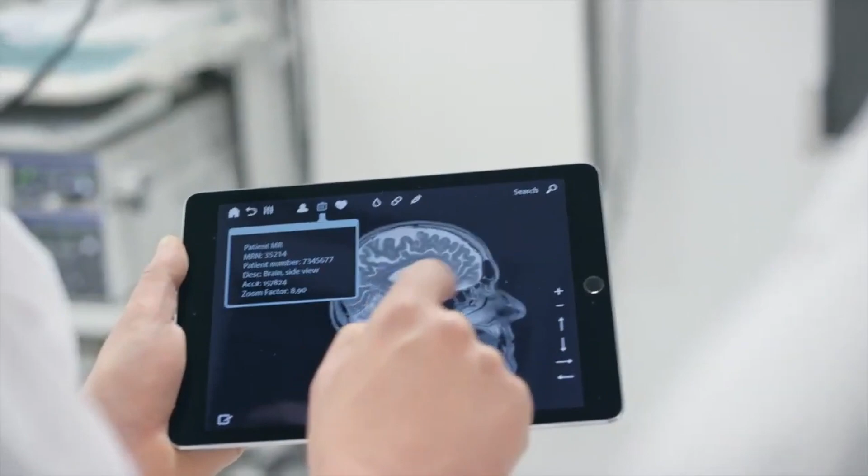Time now to introduce Dr. John T.C. Lee, the President and CEO of MKS Instruments. MKS enables technologies that transform our world. They provide technology solutions for leading-edge semiconductor manufacturing, electronics and packaging, as well as specialty industrial applications.

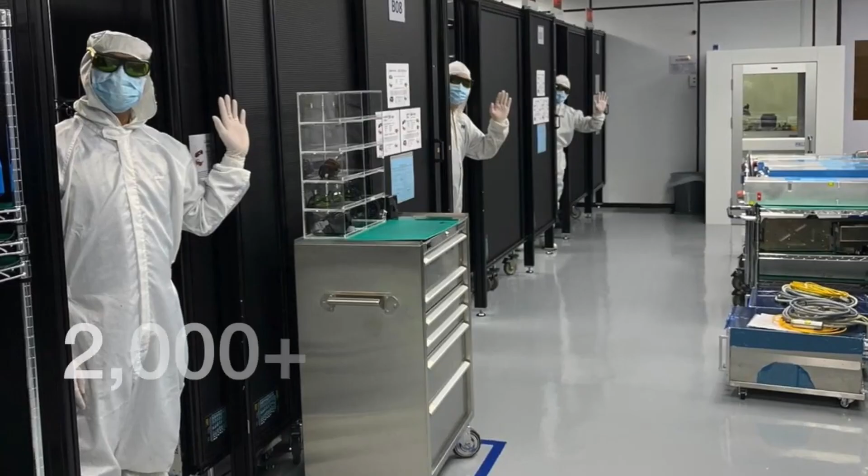MKS is a global leader with revenue of $3.6 billion and over 10,000 employees. John has been with MKS for 15 years and played crucial roles in expanding the global presence of the company, driving substantial growth in photonics, semiconductor and chemistry applications.

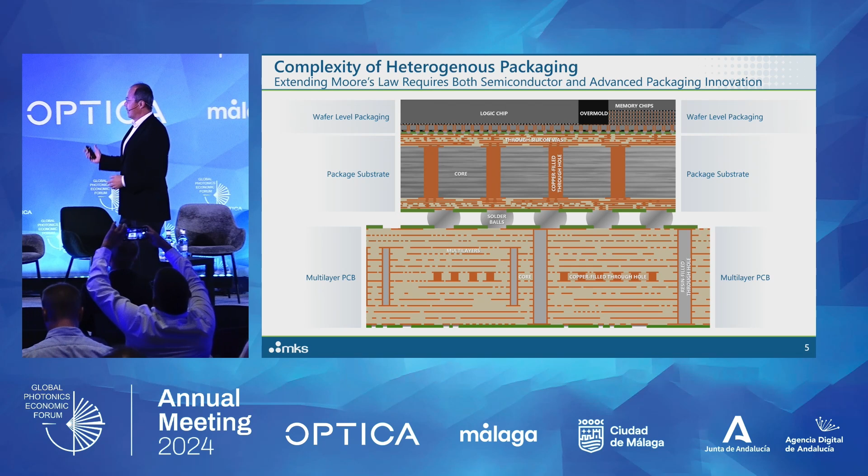That's the hard part. And then you got these solder bumps, and you see another board beneath. And that is just a regular PCB. That would be something where it's 4 or 5 layers, and you would say, that's my washing machine, automotive, and that is true. But for advanced packaging, because it's so dense, the number of chips at the top, it is now 30, 40 layers, okay? Older technology, but that's also growing as well. So you got to do all of this just to make one NVIDIA GPU board work. And that is why I say the chip is necessary, but wow, look at that packaging.

And so when you think about where the technical challenges are coming for the industry to keep more than Moore's Law going, well, you got the semiconductors thing. A lot of folks have talked about how hard that is, and it is hard. I think Luc Van den hove said the ASML extreme ultraviolet lithography tool is $250 million to $300 million. If you want the better one, it's $400 to $500 million a copy, right? That's really hard to do.

But look at all the work that we think we will need for advanced packaging. More layers, smaller features on each layer, and Moore's Law is about making things cheap. If the industry can find the cheapest way to do it, you get to have this party continue. And we see all these technical challenges in packaging, and we see the same kind of movie that we saw in semi, it's just 30 years later.

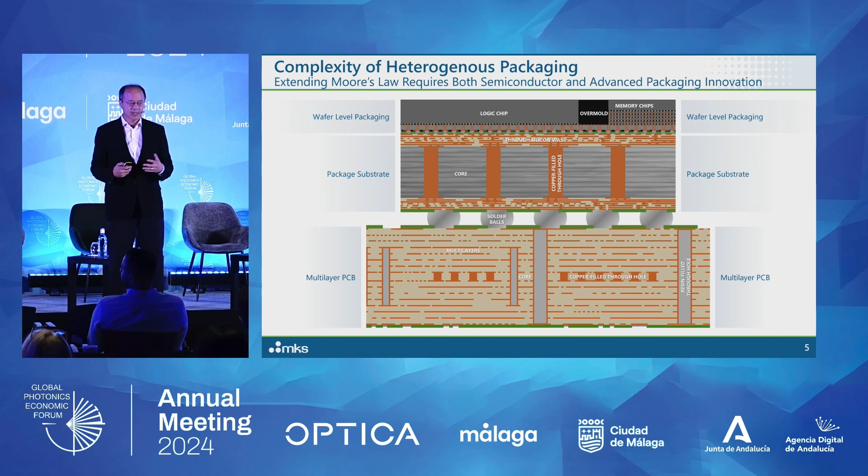So semi 30 years ago looked hard then to everybody who was in it, but you think about what we did then versus what we do now. There was a lot of work, a lot of development because of shrinking, more layers, and we see that same movie is going to play out in advanced packaging. And that's why we, as a foundational technology provider, want to be in that.

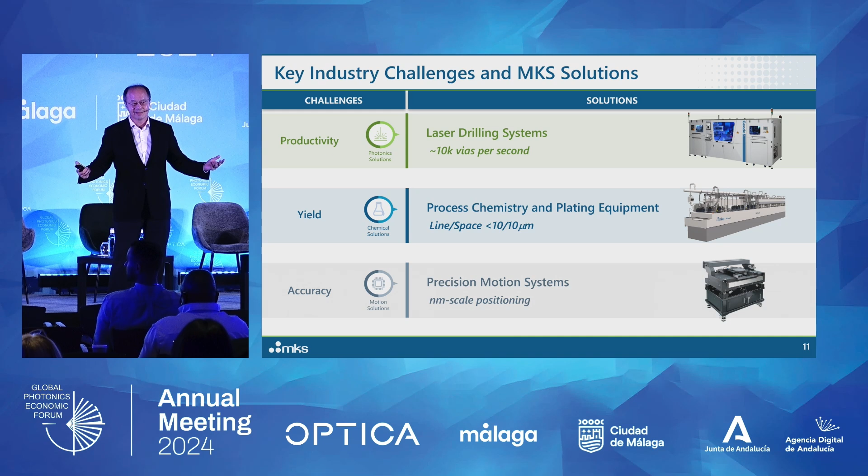Just for scale, the picture at the top is a laser drilling system. Panels go in the right, they get drilled, panels come out in the left. The height is 6 feet, and the length is 9, 10 feet. Okay, so that's the size of that tool. In the middle is a chemistry plating tool. Just for scale, the size is 20 feet high and 100 meters long. Meters, right? So in a factory for plating, you might have 5 of them. So basically, when we have a new greenfield, we're working very closely with the customer because they're building the factory around our tool. It literally is the factory, okay? So that gives you a sense of scale.

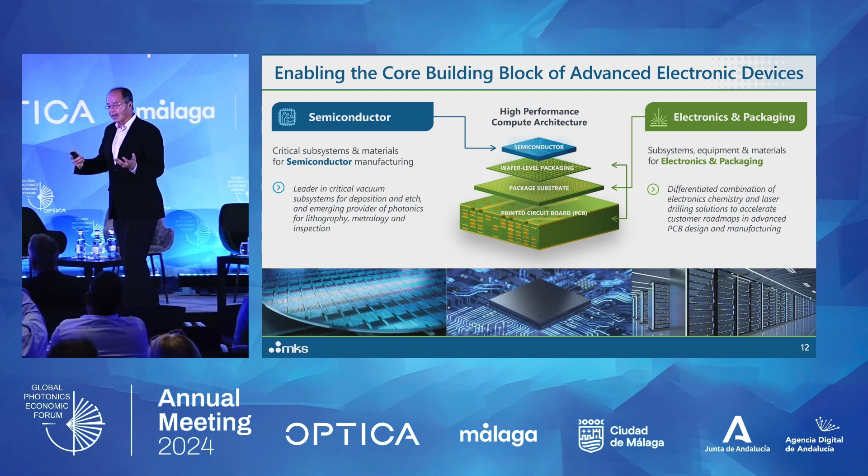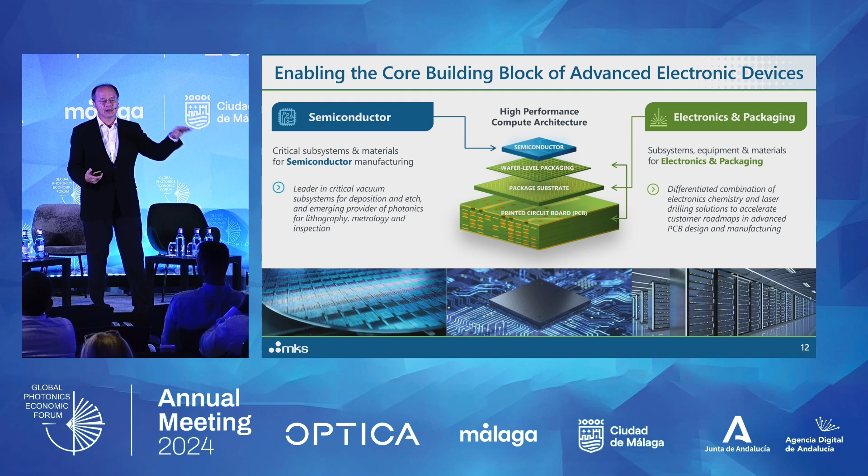And so a little more simplified, these are the core building blocks. That picture I showed earlier was complex, but simply there's a semiconductor. I've got to package it somehow through wafers, and then the package substrate, remember, just another PCB, and then an even more complex PCB. The whole idea is I've got to get the chip to the outside world. Before, I would just do some wire bonds, and I'm talking to the outside world with a chip. I can't do that anymore because I have multiple chips talking to each other, and I've got to have different layers of interconnection as it fans out. Okay, so that's really as simple as that.

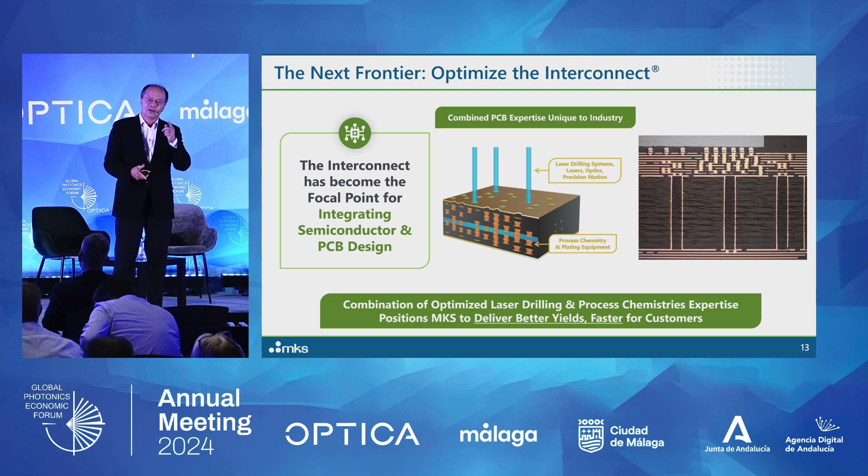And then, of course, we drill down and call that optimized interconnect. So you're drilling holes. You think about this cartoon, a cross-section, especially in the middle, you can see it looks like a semiconductor back-end chip. If some of you have seen semiconductor cross-sections, copper interconnects, different layers, holes connecting them in lines and spaces. It's exactly the same thing on a larger scale today, but shrinking every day and more layers every day.

And so when you think about the process flow for that, these substrates, I think there's a couple of substrate makers here. These are, as I said, polymers with glass fibers, but they also have copper on top. So it's called copper-clad laminate. So there's a layer of copper on top. I've got to drill a hole through that copper and through the polymer, and then I can fill it, and I've got some copper on top already.

You guys are photonics guys, right? What happens when you shoot a laser at a nice shiny surface? Yeah, bounces back, it doesn't absorb, nothing good happens, right? And so we have to pre-treat it. And how do you pre-treat it? Well, you put a coating, a blackening, in an Atotech wet chemistry bath. So it's already using Atotech for that. Then you drill it, so it's got to come out, and then you've got to do the drilling. Before we bought Atotech and brought them into the family, they were always saying we should buy a laser company because then we'd have the whole process in one company. They had that missing piece.

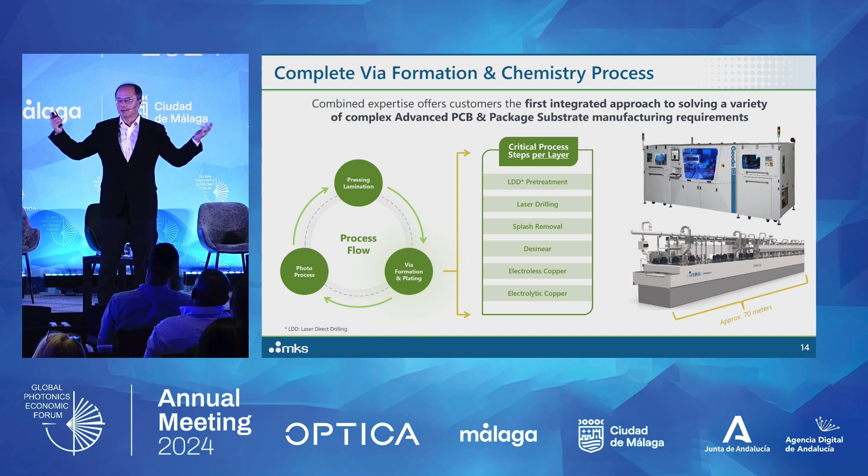Now they're all together. So then the laser drills it, and as some of you know, this is not like a nice lathe that's kind of carving out. It is an explosion. You're shooting a laser burst and you blow it up. And so what happens when you blow things up? Yeah, shrapnel, right? Everything goes to the side. You've got to clean it. Then you've got to pre-treat the surface, and then you want to put the copper in that hole. And electrolytic plating is the fastest. Electrolytic means I use electricity, right? I can only use electricity, though, if there is a continuous conductive surface. And the hole, remember, only the copper's on top.

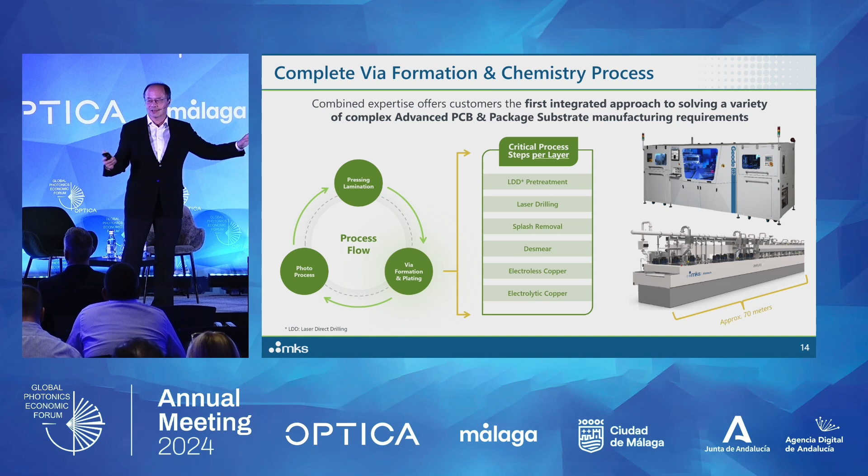The hole is polymer and glass fibers. There is no continuous conductive surface, so I've got to do electroless, no electricity, copper plating first. It's slower. I've got to do it right. Can you imagine trying to put a nice layer of metal on a hole you just blew up with glass fibers sticking out? Literally, when you do cross-section, just glass fibers sticking out. But once you do that, then you can do electrolytic, which is much faster, and you have to fill it.

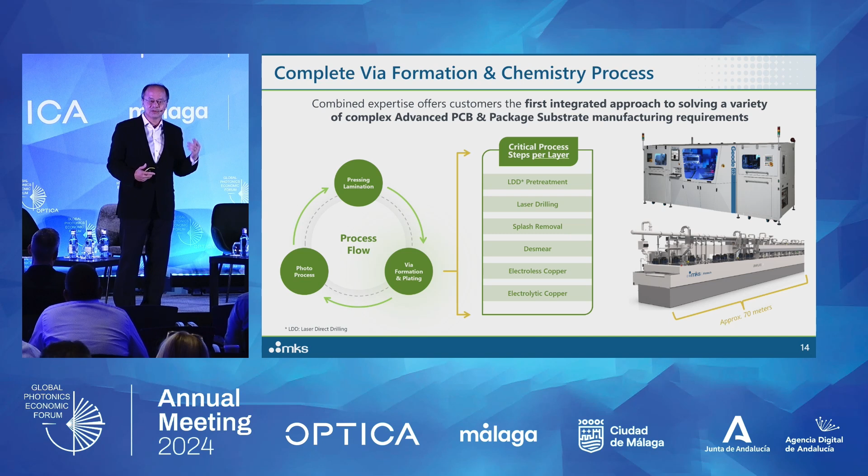And now, here's a challenge. The holes are getting deeper, higher aspect ratio. How do you tell chemistry atoms to go plate the bottom first? Don't plate the sides, because you pinch it off, you got a hole, right? And by the way, don't plate the top, because I don't have to remove as much there. So we are literally using chemistry formulations to plate at the bottom of the hole first and fill it from the bottom up while we're preventing plating on top.

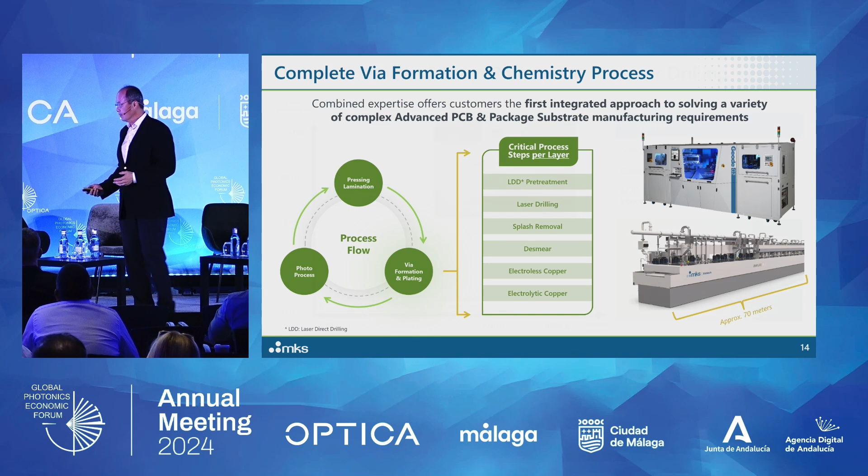So that's why Atotech, that division's gross margin is actually the highest in our company. It's higher than the optics we send to ASML, right? It's not an easy thing to do. But we do that. And here's a little picture now focusing on one particular step, the laser drilling. On the lower right is a laser drilling tool, drilling stuff. I'll show you more about that.

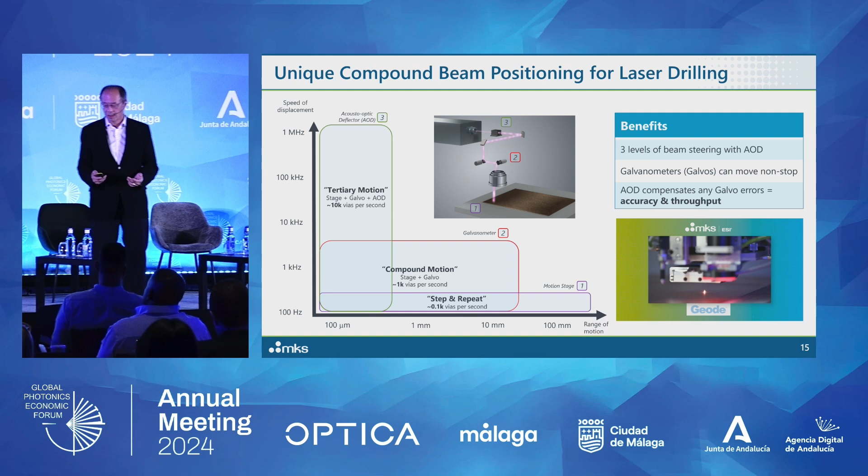The second motion is galvanometer on top, and that can steer the beam. That is less range, but faster. And then the last one is even less range, but really fast, and it's called an AOD, acousto-optic deflector. And we use all three. So you're probably wondering, what is an acousto-optic deflector? This is where photonics really comes in handy. So number one, it's a crystal. There's no moving parts, so high reliability.

You put an RF drive on the bottom in the cartoon. You can see the coil on the left in the picture. And that's a megahertz RF frequency. And because you're putting that megahertz frequency, you can actually move and control the beam as it goes through the deflector, the optical crystal. You can move it so it's going this way. You can move it so it's going that way. You can change the amplitude, therefore the power, really at the megahertz regime. So that's the photonics innovation.

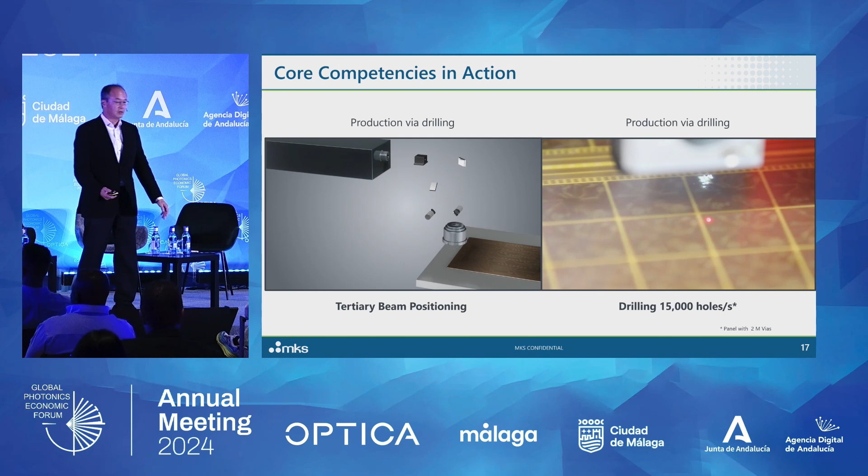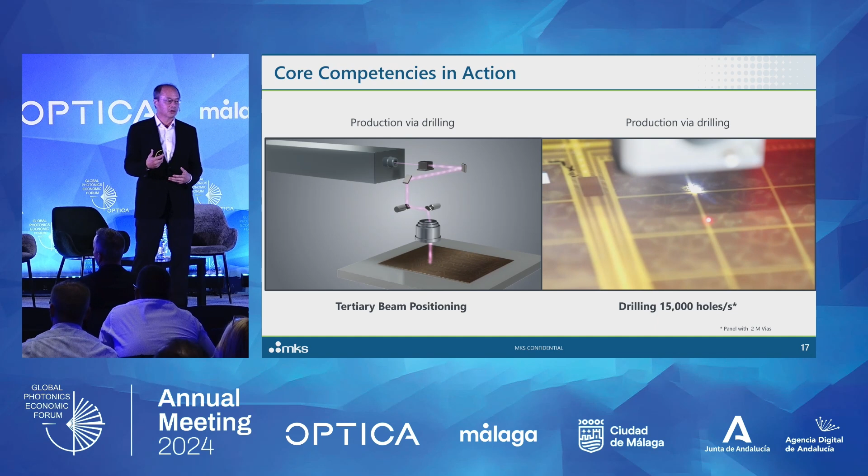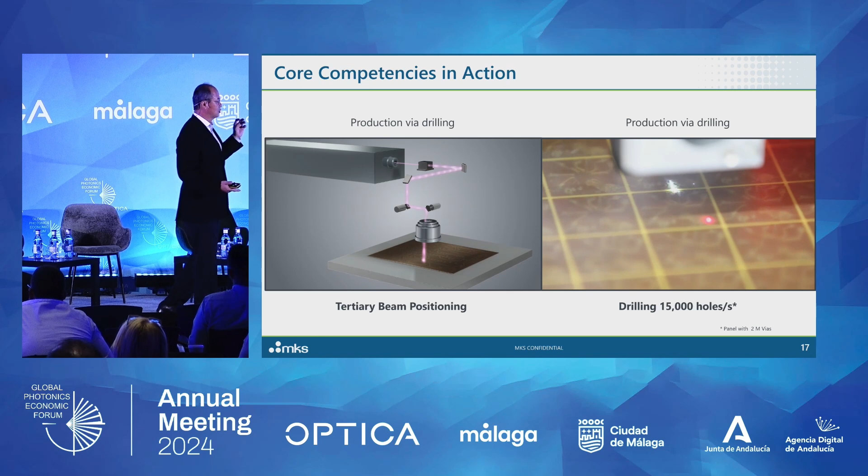And here's what happens. On the right is a real laser drilling tool, drilling holes in a real panel. On the left is the cartoon that shows you the laser going through the acousto-optic deflector, the galvanometer, and then the motion moves. So all three motion. And you gotta have the software to control all this, because the holes are not always in the same place. By the way, the holes sometimes are not the same size. And this acousto-optic deflector can actually drill holes of different sizes along the way serially. Most other tools have to drill one size hole, come back, do the whole panel over again, a different size hole.

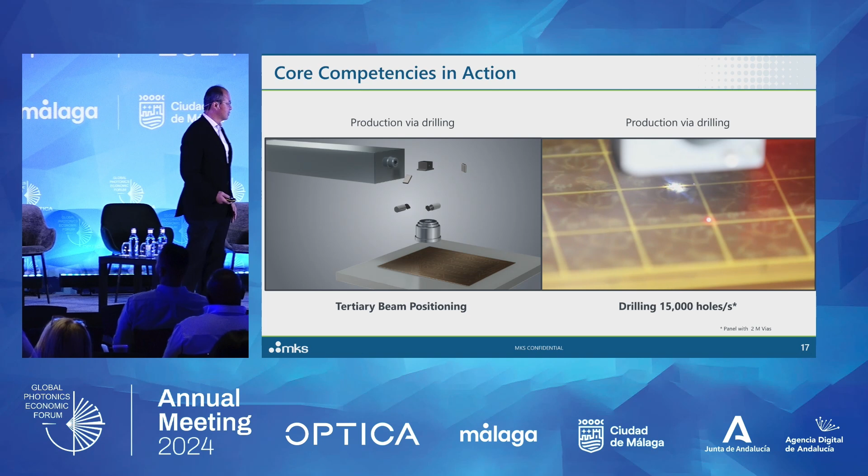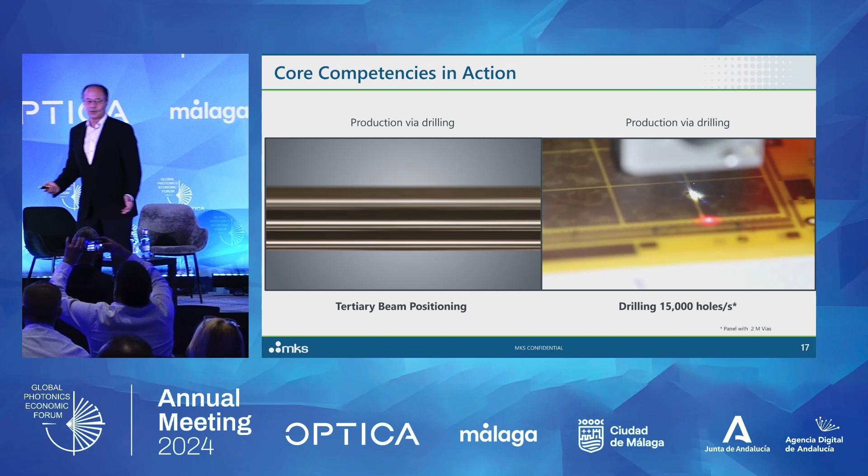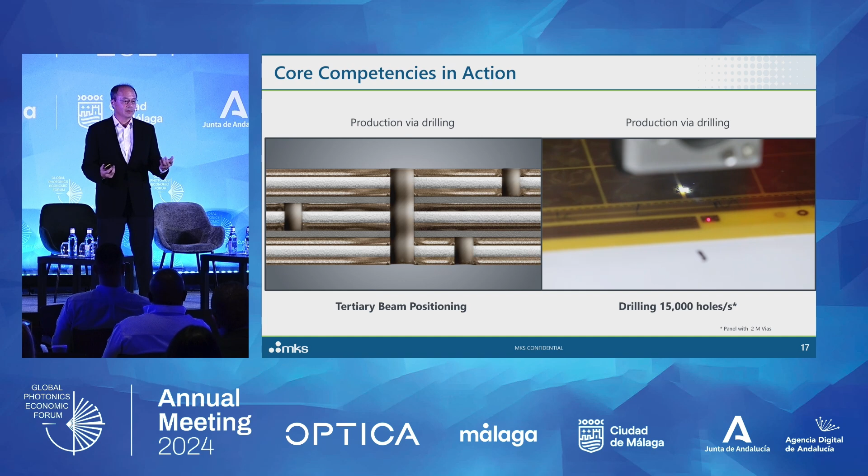Notice the really interesting number, drilling holes at 15,000 per second. That's not a typo. So when we were doing diligence, being a little technical, I said, is that a typo? How do you drill 15,000 holes in 1 second? That's just hard to imagine. And they said, well, John, don't you guys make nanosecond pulse lasers? I said, yeah. Okay, what's a nanosecond pulse? It's the length of the pulse of that laser.

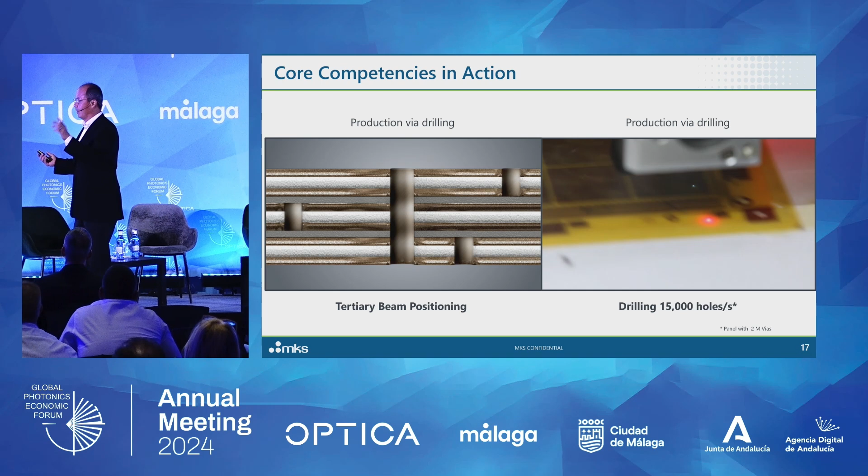We make that. We also make picosecond, femtosecond. So nanosecond means the pulse is only a nanosecond in time. So how many pulses can I put in a second? Yeah, a billion. A lot. More than the 15,000. So I got lots of time and space to put a lot of pulses into it. And I do. But you got to move it, right? You got to move it really fast and coordinate it.

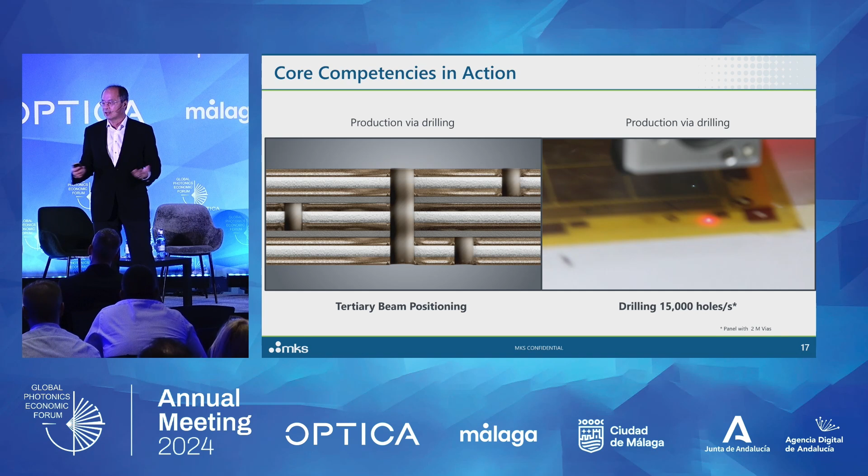And so that is literally an example of how we are using photonics and all the things that we think photonics is, motion, optics, and lasers, to enable AI because of packaging. Okay? And so I wanted to stop there because we can talk forever about packaging, but for the photonics community, a little different spin for all of you, because I think a lot of you are talking about other applications. How do we make photonics be the communication mechanism between chips, et cetera? All good, and I hope it happens, right? But here, photonics is already something critical for making AI chips today.